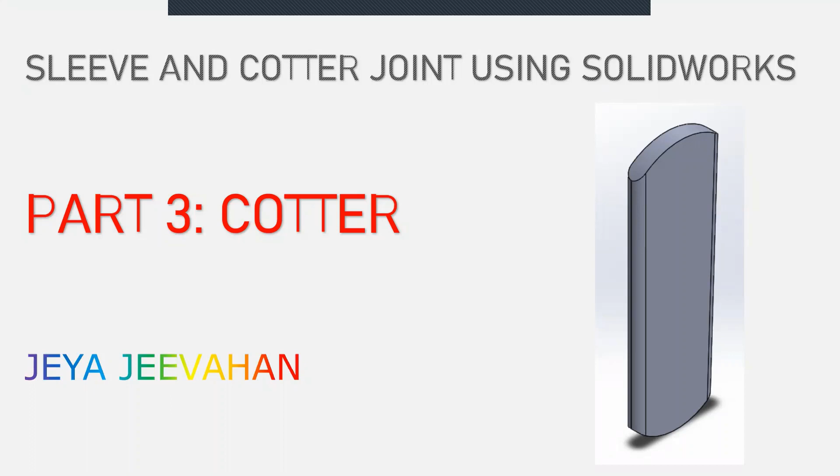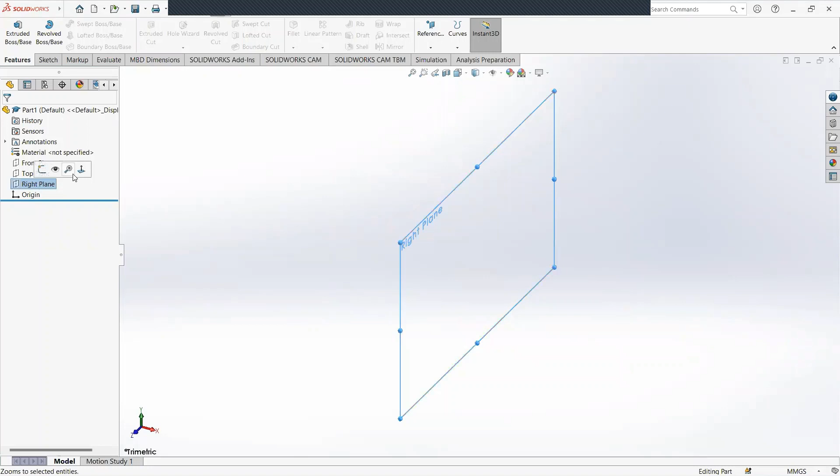Go to New, select Part Modeling and then click on OK. Select the right plane, make it perpendicular, click on Sketch and draw the sketch. Click on Line,

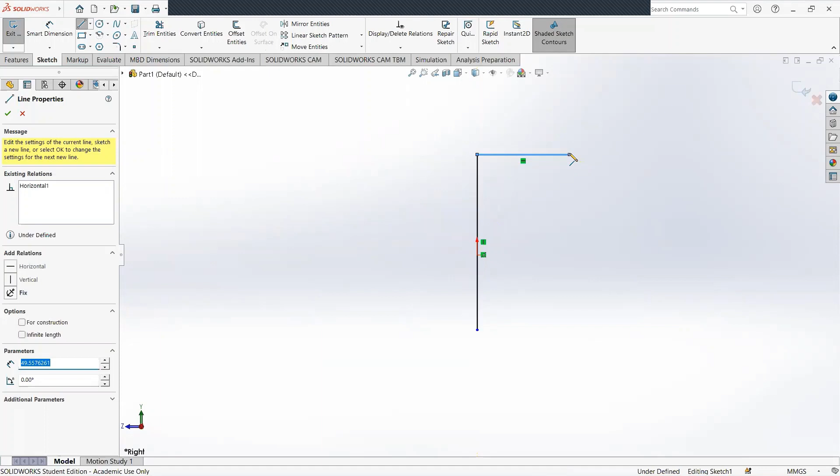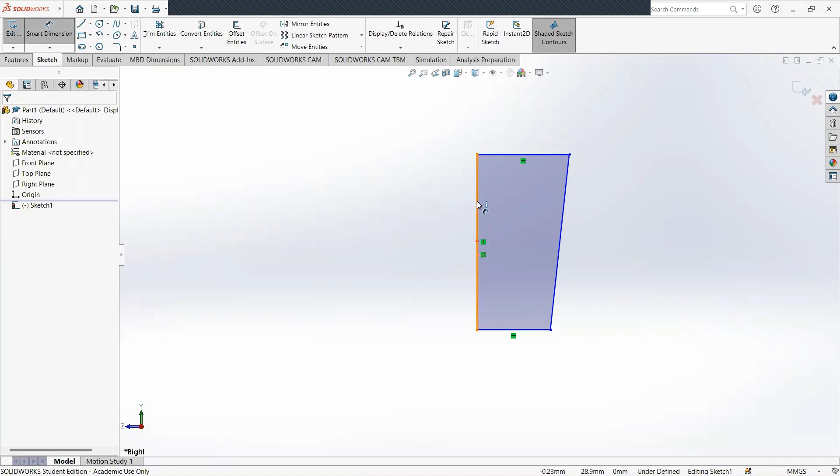after drawing the lines, we'll modify the dimension. This would be 90 millimeter, and we'll make it exactly half, or the plane in the middle. So we'll select the midpoint and this edge, and the dimension would be 45 millimeter. Now we'll set this dimension, which is given as 34.5 millimeter.

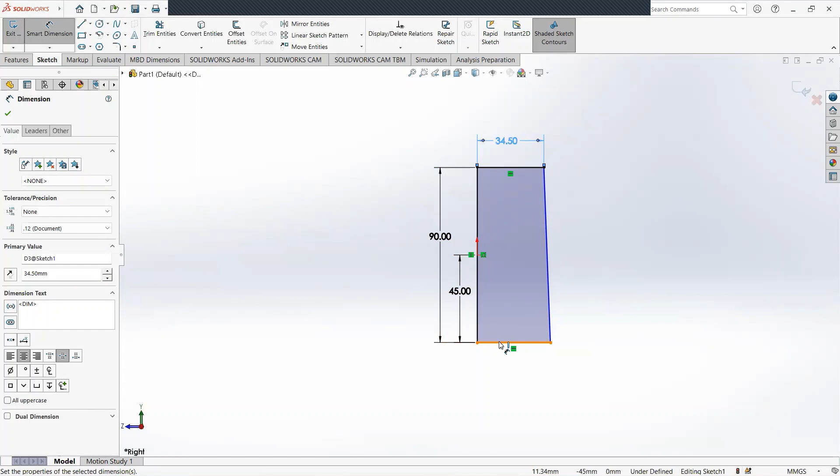As there is a taper, we will give this dimension 31.5 millimeter. Alright, so 3 mm is reduced because there is a 90 mm length. Since 1:30 is the taper ratio, for 90 mm the taper size should be 3 millimeter. So 34.5 in the upper side, 31.5 in the lower side. The dimensioning here is over, and we need to add a small circular pattern here.

To add that, we may select circular arc. We may use a 3-point arc for this purpose. So click 1. Okay, it's coming in opposite direction. Escape. Click on 3-point arc. Click the first point, second point, which is the end point, and click wherever you wish to click on to set the radius.

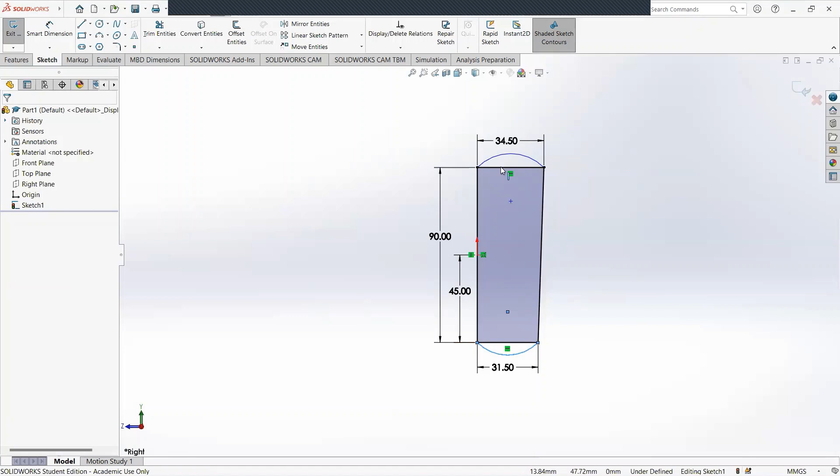Similarly, we do it in the bottom. First point, last point, and some area. Say OK. Now we have to remove this line. To do that, we can click on Trim option. Click on Trim Entities here. Set the power trim on, and by clicking and crossing over, we can remove this line.

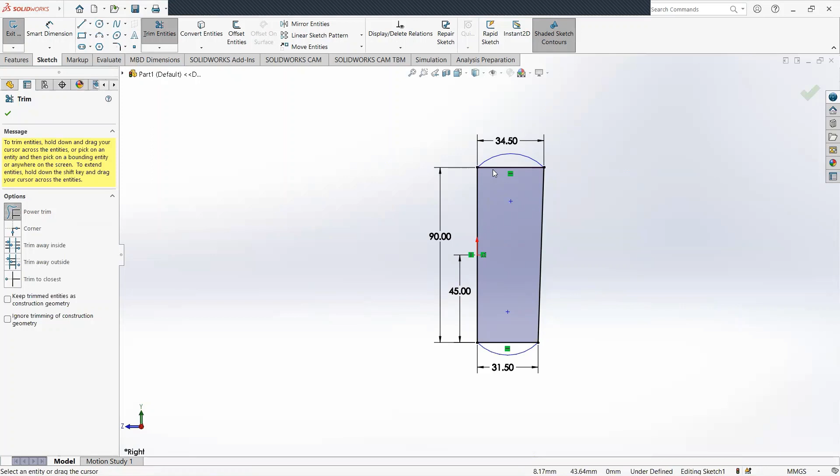Left button click and cross over. Left button click and cross over. Right. Now the sketch is OK. Click on OK. Select the sketch. You can even see in isometric projection, it looks like this.

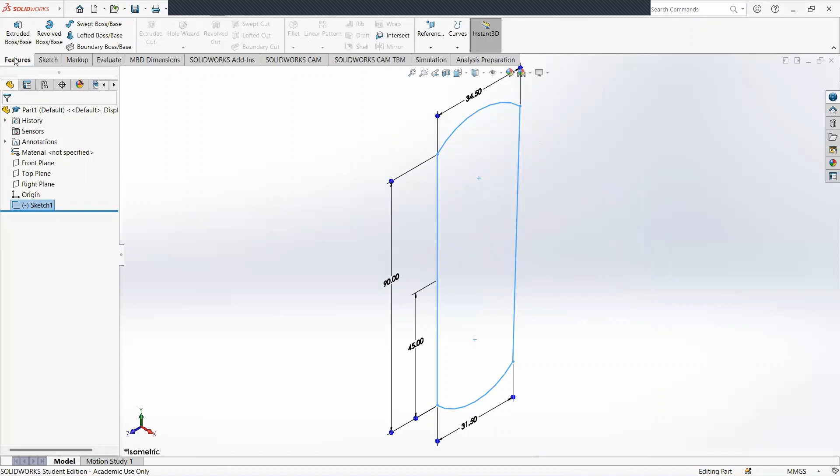Select the sketch. Go to Features. Then click on Extruded Boss/Base. Here you select the mid plane so that the plane is in the middle, and give the dimension as 6 millimeter. Click on OK.

Now we need to add a fillet on all 4 sides. For that, click on Fillet, then items to fillet and radius should be given. The radius is 3 millimeter. Now we'll select the items.

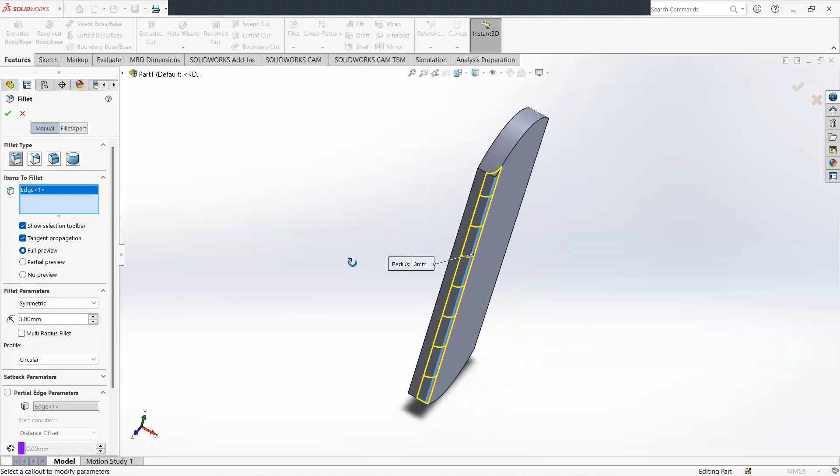Edge number 1, edge number 2, and on opposite sides, edge number 3 and edge number 4. So we have selected 4 edges and then click on OK. That's all. The part is ready.